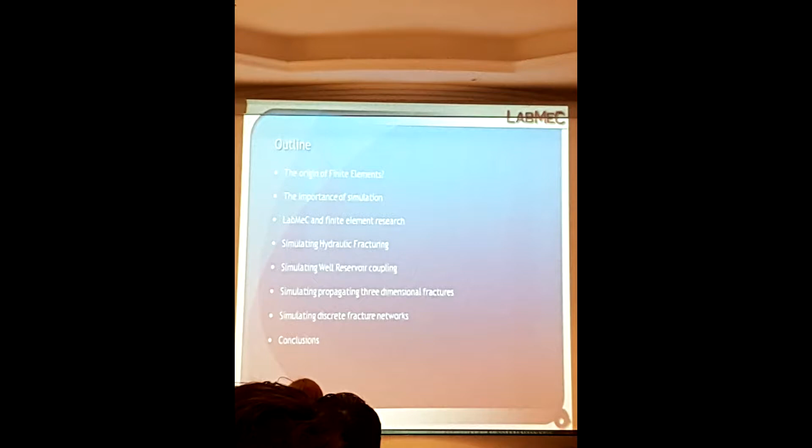So numerical simulation, what's the essence of numerical simulation? So at the first point, we always have a physical problem. That's the start.

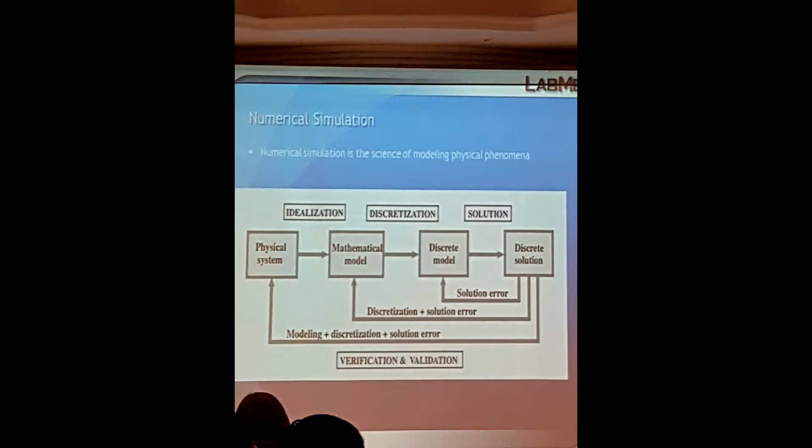Okay, so now I'm going to go back a little bit and talk about the origin of the finite element method, which I think shows how engineering problems actually have steered the development of the numerical approximation techniques. So that's why I think it's relevant. The first finite element models of the development of the technique were motivated by aerospace engineering and by simulation of the loads on airplane wings in particular.

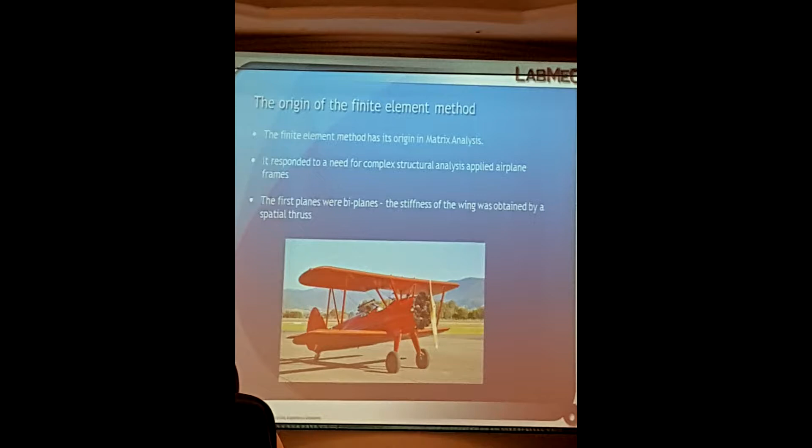So at the end of the First World War, the airplane evolved. I mean, it was known that the speed of an airplane is determined by the drag coefficient. So if you have two wings, you have twice the amount of drag than if you had one wing. So a monoplane was obviously much faster than a biplane.

And in warfare, the faster the plane is, the more agile it is, and the more probability it has to bring down the opponent. So a monoplane was the way to go.

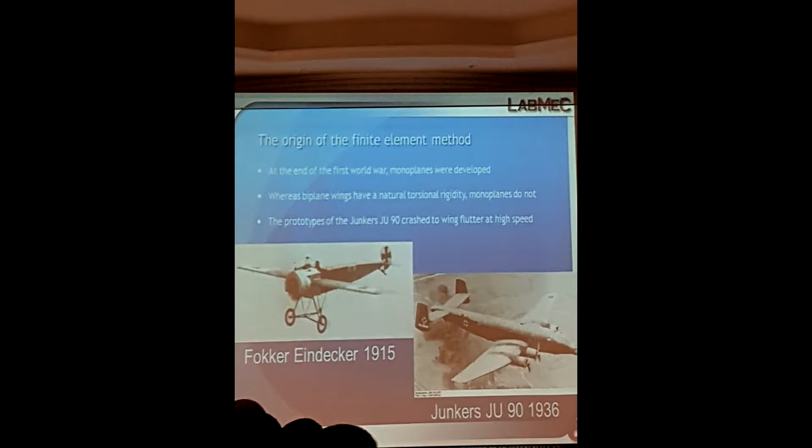So what happened with the monowing is that you don't have the truss system anymore. So if you look at the structure of a wing, internally you have a truss, okay? But this truss does not have by itself torsional stiffness. So in order to have torsional stiffness, they have to cover the wing with aluminum plates or with plywood plates in order to obtain the torsional stiffness.

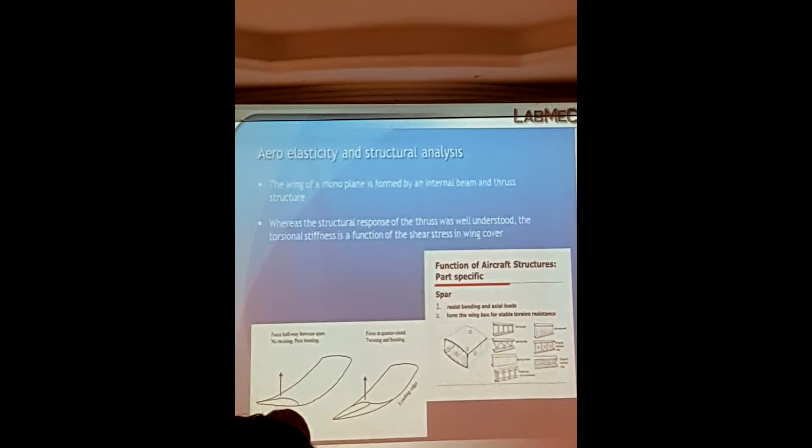Okay. So the torsional stiffness of a box depends on the shear stress in the plane of the box. And this shear stress cannot be computed with matrix analysis.

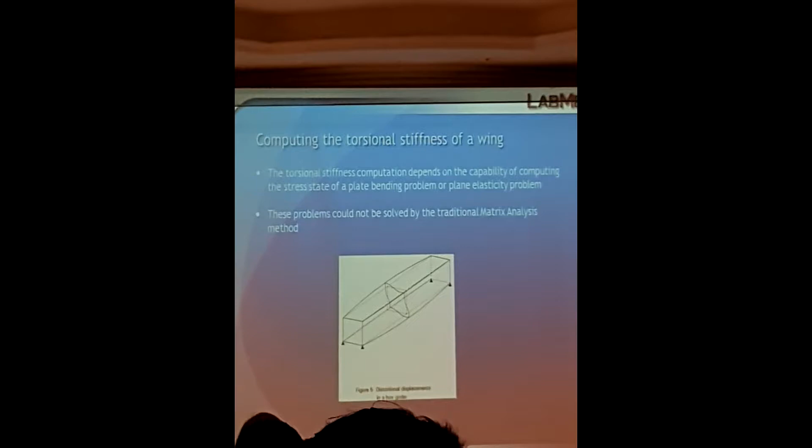Okay. So the problem was solved by engineers of Boeing and researchers of the University of Berkeley, and they developed a direct stiffness method to compute the stiffness of the box wing. This direct stiffness method was the origin. If you look at this publication, you see exactly what finite elements are.

So here we have Clough. That's the only picture I found of those 4 researchers. The other one I couldn't find.

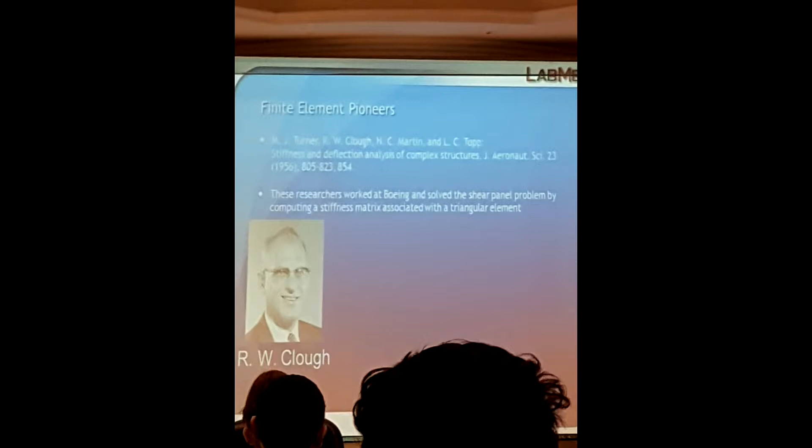So this is a publication of '56. For those, most of you were not born, I was not born at that time. But there were no computers. I mean, the digital computers available started with Fortran 1, and it's more or less 1960s that you have the first digital computers.

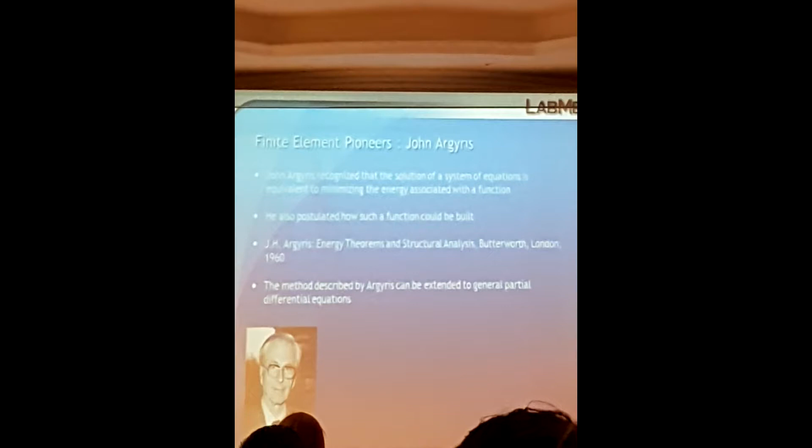So, okay. Yeah, automático.

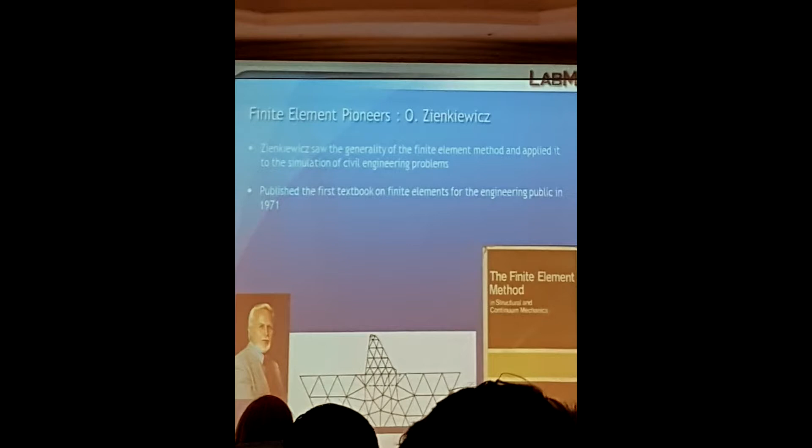Another finite element pioneer is the person who has been my PhD advisor, Professor Oden. He made the bridge between the finite element technique which Zienkiewicz published in his book, which was essentially an engineering method for solving structural problems, and the mathematical community. And so he has brought a lot of understanding of the mathematical properties of

the finite element method. And he has this first book in '76, which shows you a little bit: '56, '60, you have Argyris showing the minimization, 10 years for Zienkiewicz to write his first book, and then '76 to show that the technique is actually something much more general than the structural analysis method.

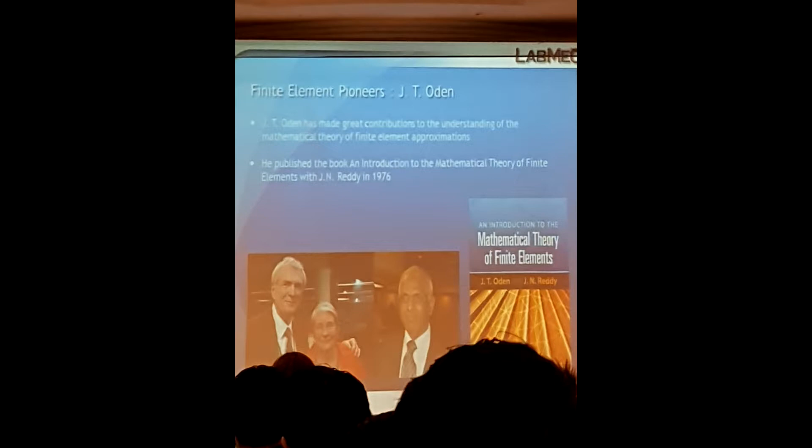So this brings us to the question: where are finite elements applied? Why is this important for us? It's very commonly applied in very expensive projects, like building of rockets, huge engineering structures, or in mass-produced items. So it's safe to say that your iPhone has been thoroughly simulated by finite elements. Your car has been very much simulated by finite elements.

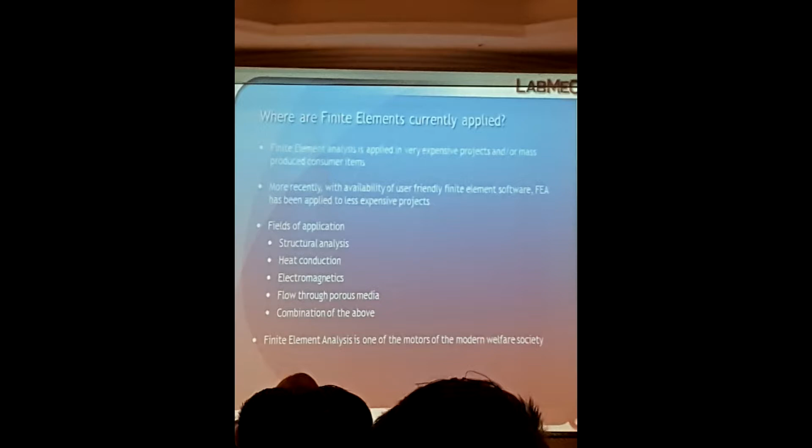So, this is one of the examples. I will go to petroleum engineering, but this is one of the most critical examples, the most important examples. So, what do you have in a car? Well, you have crash simulation. You can totally simulate how a car will deform under an accident, so that's extremely important. It's not the kind of use you want for your car, but when it happens, it's extremely important that the habitat where the driver is is not affected by this car crash.

You have acoustics, so we have the fluid flow, the vibration of your mirror, the vibration of internal power, thermal comfort simulated. The tires are totally simulated with finite elements. The interaction between the different layers of your tire is the area of finite elements. The design of the profile of your tire is a fluid structure interaction. This is also a crash.

The gearbox, the stresses in your gearbox, totally simulated with finite elements. The crankshaft, the stress in the crankshaft, the optimization of the crankshaft, trying to take out the last gram of the piece, shock absorbers, everything is simulated with finite elements.

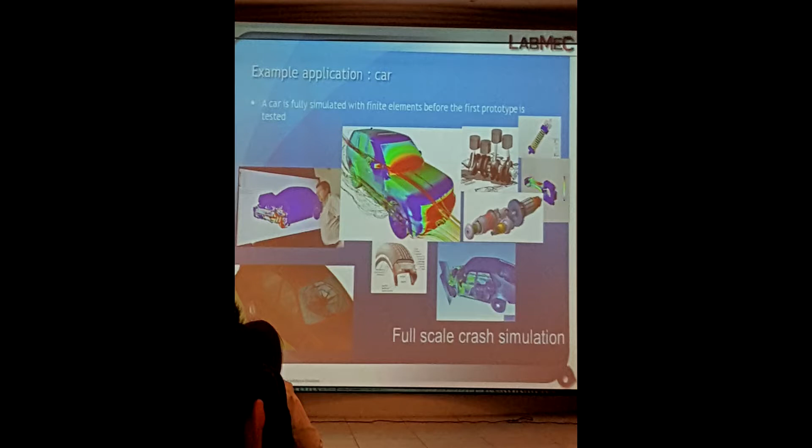Okay, so here we get to petroleum engineering. One of the first engineering applications in petroleum engineering obviously was the structural analysis, which is the origin of the finite element method, in which the platform is being simulated for stresses, that's okay, but mainly for safety, because those jacket platforms are usually in the sea and they are subject to periodic loads. And so these periodic loads can lead to fatigue problems.

So a fatigue problem is like if you take a piece of paper and you bend it enough, if you've done it millions of times, the paper will rupture. And so the same thing happens with those platforms. They are being subjected to wave loads for years and years in time. And so they should not fail due to fatigue. So this is where the main problem is in terms of research and finance: to avoid fatigue problems.

Entrando en el campo del petróleo, podemos observar que tenemos unas plataformas marinas, y estas plataformas fueron simuladas nuevamente con el método de elementos finitos, y las cargas son simuladas como inició el método en la estructura. Estas estructuras tienen diferentes cargas, producto de las olas y de la marea, que generan un movimiento.

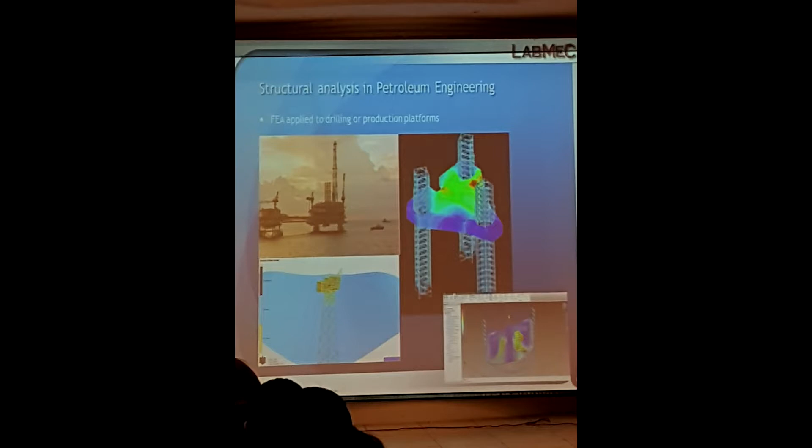Finally, we arrived in the area of real interest in petroleum engineering: extracting the oil from the reservoirs. The reservoir flow is one of the most important parts in petroleum engineering to be simulated, because the amount of petrol you can extract from your reservoir depends essentially on the way you're going to extract it. Once you have a reservoir, you don't try to extract the maximum amount of petrol right from the start. If you do so, you will produce coning.

It's like, if you have a cup of ice or an ice drink and you push too much, very soon you're going to have air in your straw, and so you don't get very much ice, because once you have air, you only get air—you're not going to get any ice anymore. I don't know if the similarity makes sense, but it means that in order to extract the petroleum, you need to study or optimize the way you're going to get the oil out of the reservoir to the drilling site.

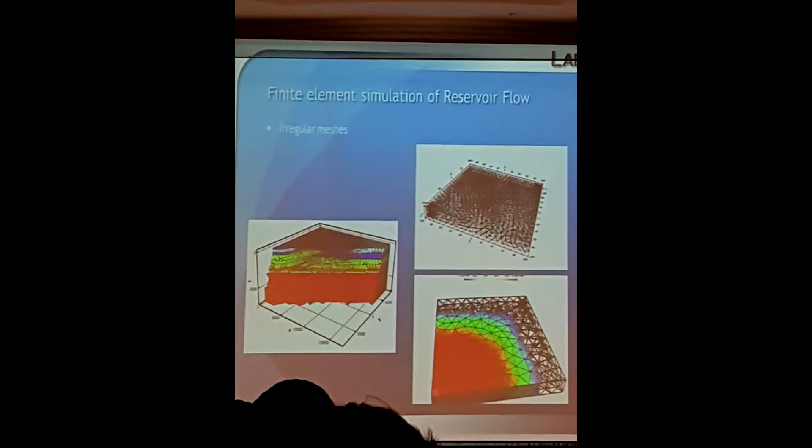Another application in petroleum engineering, which is very much in fashion and being developed now, is to simulate the deposition of organic material in geological flows. Petroleum is generated by the decomposition of organic material that was being transported many millions of years ago. The essential thing for a petroleum company is to guess where this petroleum can be found, so we try to simulate the geological times and see where most likely the organic material has been deposited and trapped.

So it's not enough to have organic material. You need to have traps also. You need to have cap rocks. Without cap rocks, that organic material will have produced petroleum, but it will have evaporated, and we can't produce it. It will not be there.

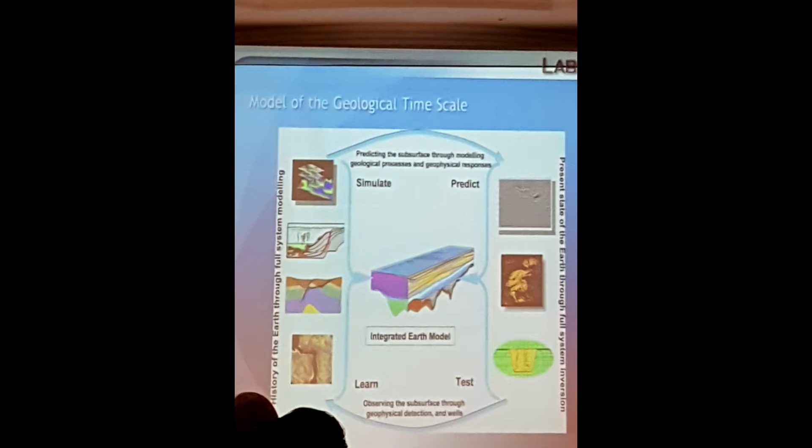Now, another area where our laboratory has worked is the simulation of hydraulic fracturing. When you generate petroleum, you need to pressurize your reservoir at an injection well. If you don't do this, your reservoir will have a pressure drop, which can lead to pore collapse and the loss of permeability of your reservoir. So you always have, in general, a producer well and an injection well.

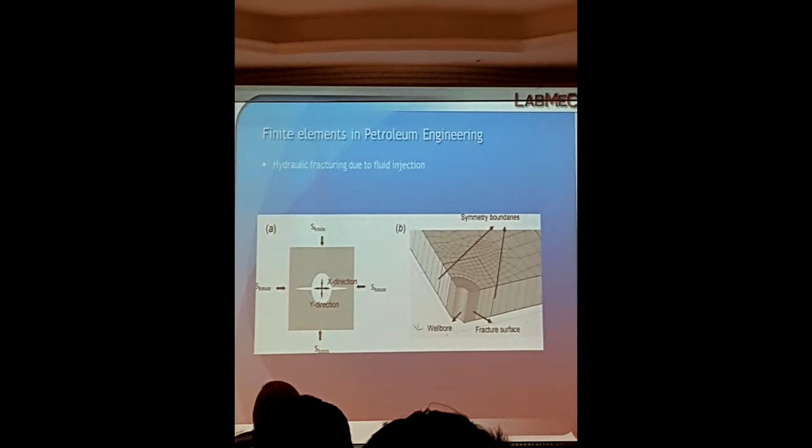This is another example of fracture simulation. One was a fracture induced by fluid injection, but a very active line of research nowadays is production in shale gas. In shale gas, you essentially have a reservoir which was fractured in the first place, and which we're going to stimulate in order to extract the gas from that reservoir. We have to simulate it. We can simulate it, but it's a major effort.

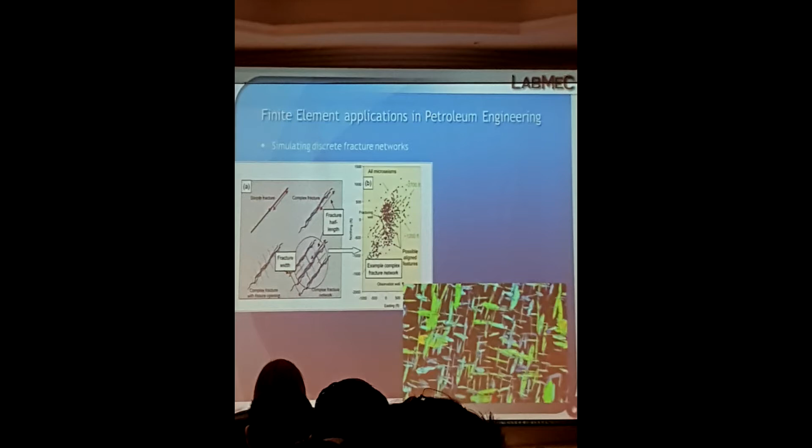So now I want to show you, I think I will show only one project because otherwise the talk will be too long. If you could look, we're going to go through many slides now. I want to go to the fluid, to the well reservoir coupling.

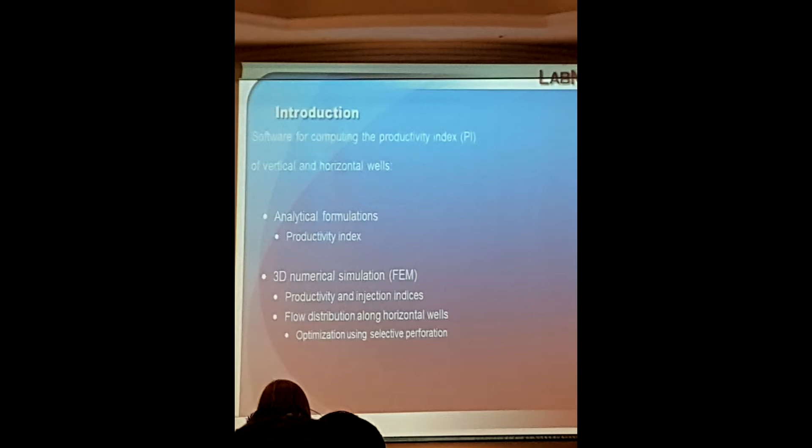So the simplification we did, so when you develop a numerical model, you never develop a model for the total physics, or hardly you do it for the complete physics. So the first thing you do is say, I'm going to simplify this, this, this, and this. So this is the slide which details the scope of our simulation. So it's, in this case, monophasic flow, steady state, drainage areas which are rectangular or elliptical, with skin factors, and then working towards high performance as well.

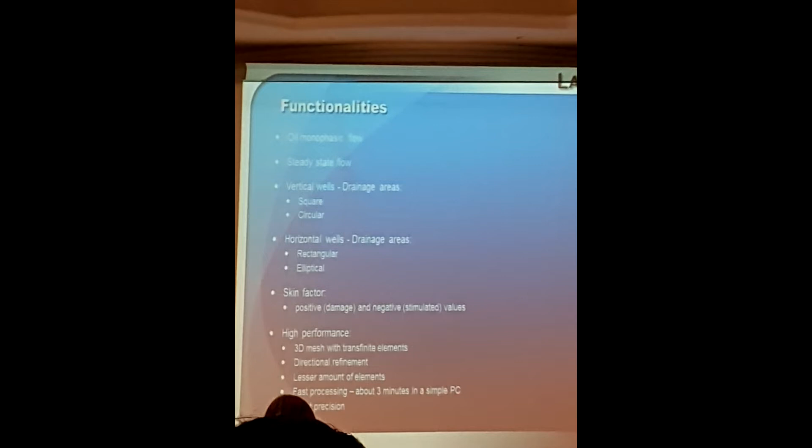We developed many technologies in the laboratory and I will show them graphically. We developed technology for curved elements, and we developed directional refinement and high-order approximations. So those are the three main technologies we developed in order to get to an efficient solution.

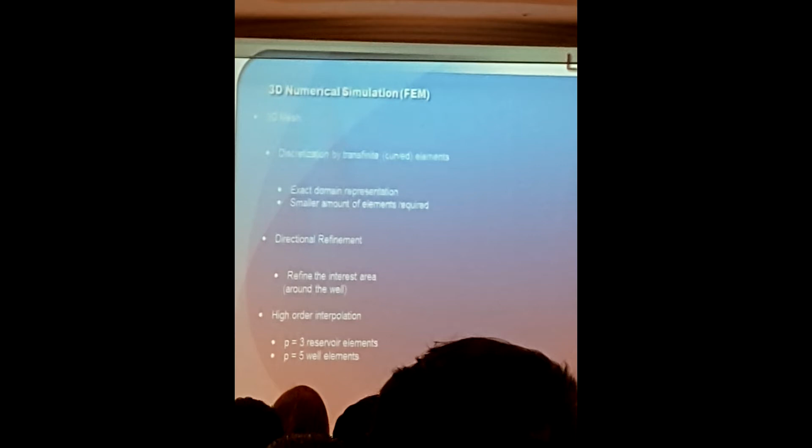So, using nonlinear mappings, we did model the reservoir just like in a CAD project in almost 21 global blocks, more or less 21. 19 blocks. Okay.

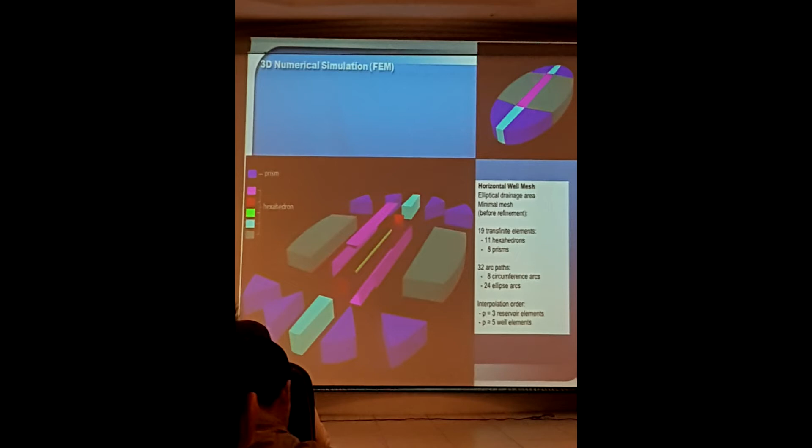So the challenge was to produce a well, a finite element mesh, which can zoom into the well efficiently. So you see here we have large elements that are about 70 meters wide, more or less. And towards the well we zoom towards those 20 centimeters.

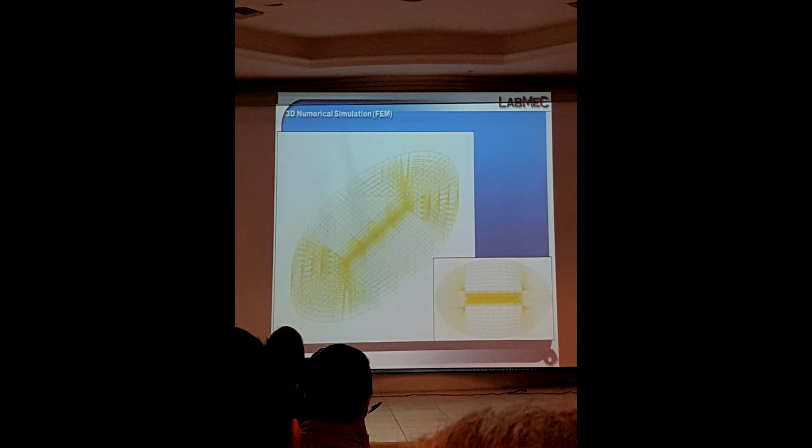So one of the technologies we developed was to do non-linear maps. So we start with the hexahedron, which looks like that, and then we map the upper border of the hexahedron on the circle, which is the exact geometry of the well. And so this is how we, even though having a very coarse mesh, we have an exact representation of the geometry of our problem.

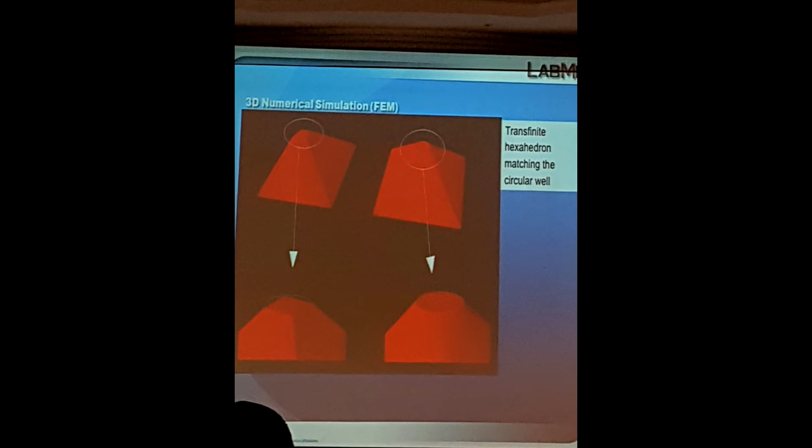Yeah, you can do the same thing for vertical meshes, but I will talk about it.

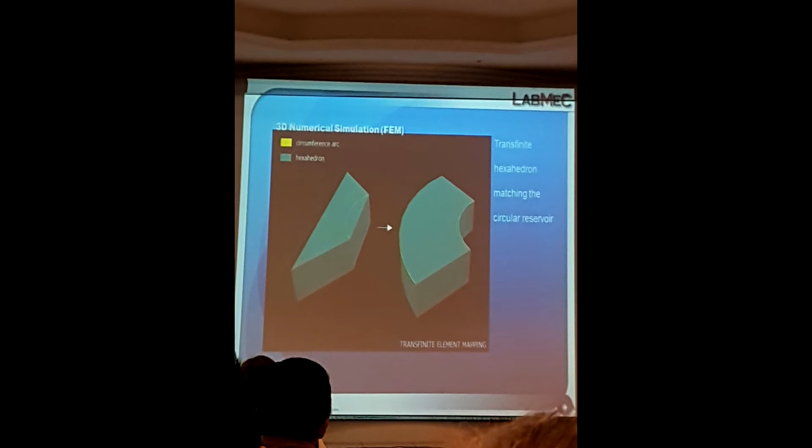But this is not what you want when you want to approximate the well accurately. You want to refine only in the direction of the well. And so conceptually it's simple, but in terms of programming this is a lot of effort. And so we developed this technology.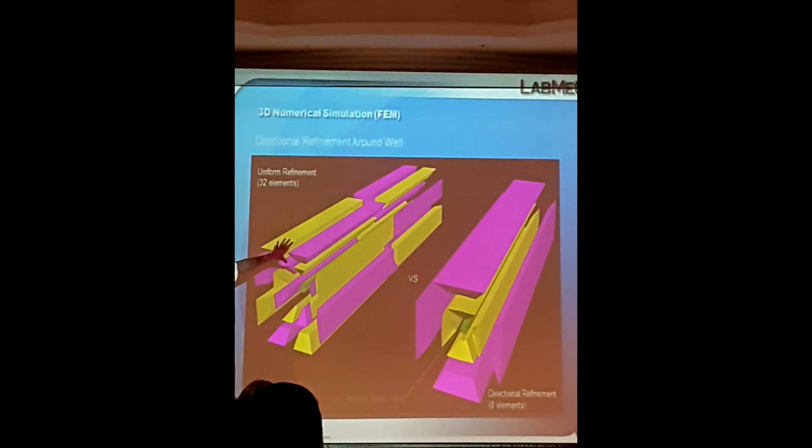So you see that this is a graphic representation of a directional refinement. So we are interested in simulating the details of the flow around the well. So we don't cut our elements in four, but we zoom towards the region of interest.

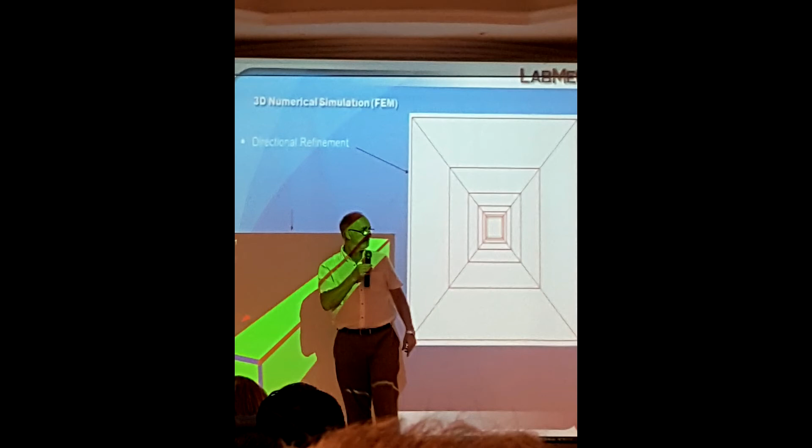Then we also coupled the flow in the reservoir, which is three-dimensional, and represented the flow in the well as a one-dimensional simulation. So then we had to develop a technology to couple 3D flow with 1D flow in a consistent way.

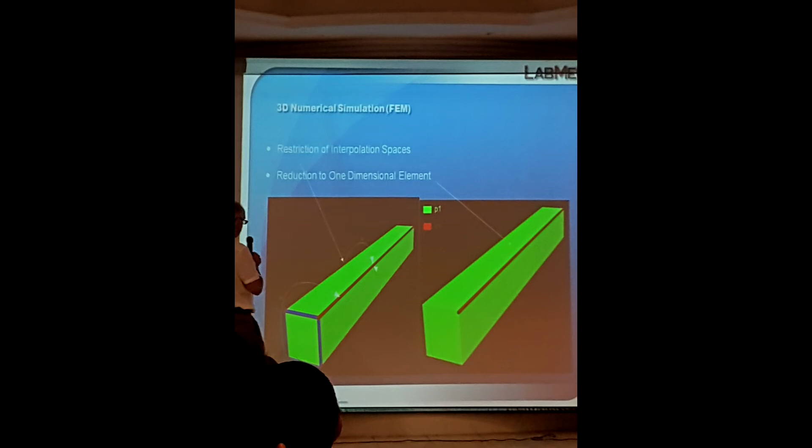The differential equation.

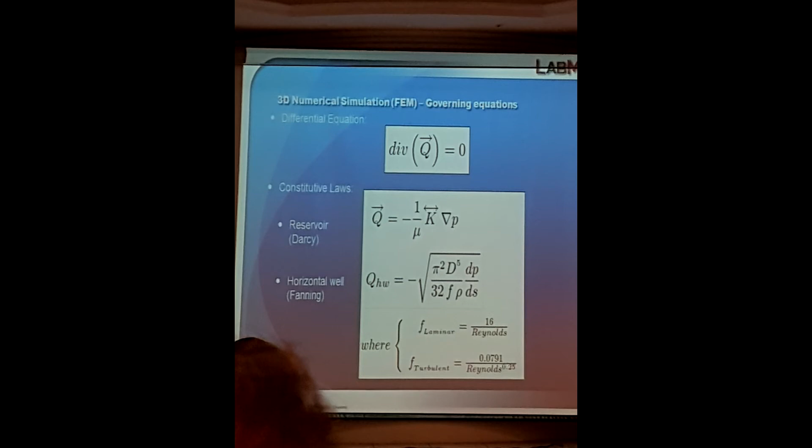The skin factor is modeled also, as we have a well flow and we have the reservoir flow, and there's a difference between pressure between the reservoir and the well, which is modeled as a resistance. So the fluid flow is proportional to the difference of the pressure of the reservoir and the well. It acts as if you would have a barrier.

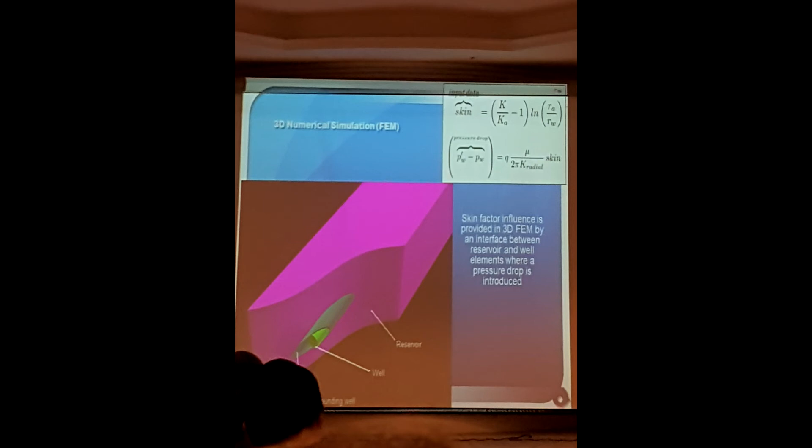So, one additional effort we did with our research group was to provide the petroleum company with a graphical user interface. This is kind of uncommon in research labs, because usually a research group will give working software to the petrol company, which they have to feed with an input file. We went a step further and made a graphical user interface.

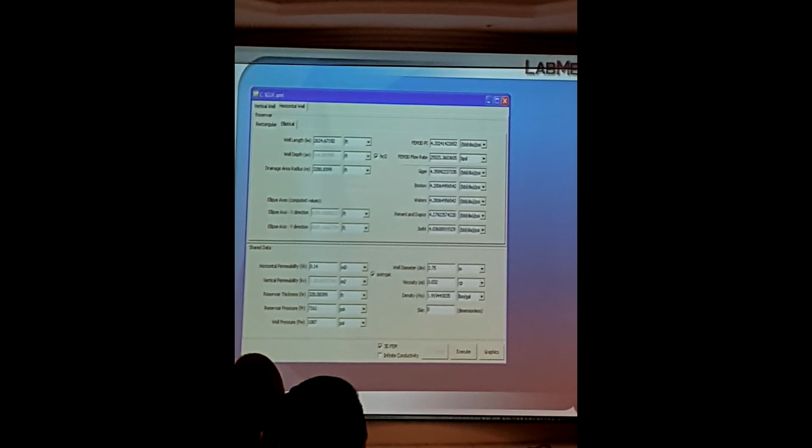Well, this is the setup of the Troll field. So we simulated a typical problem, which is a Norwegian field, which has been simulated by Ozkan, by finite differences. In Petrobras, they simulated the problem with CFX, which is a known finite element software, and in the green line we have our simulation. So these are the production.

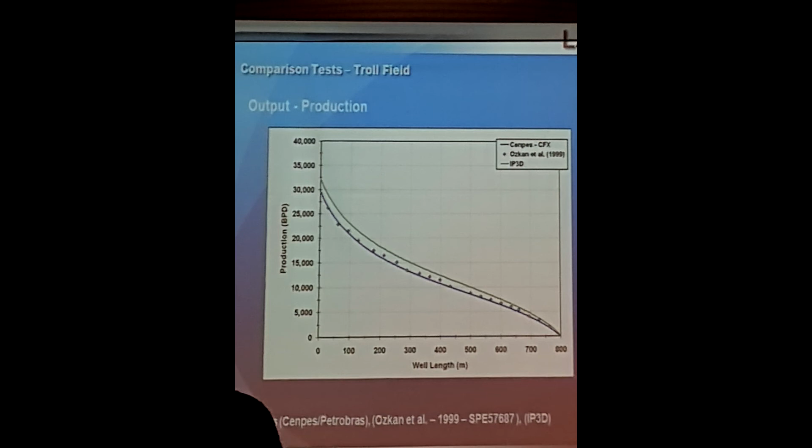So this is the rate of production at each point in the well, and you see you also have a very good agreement.

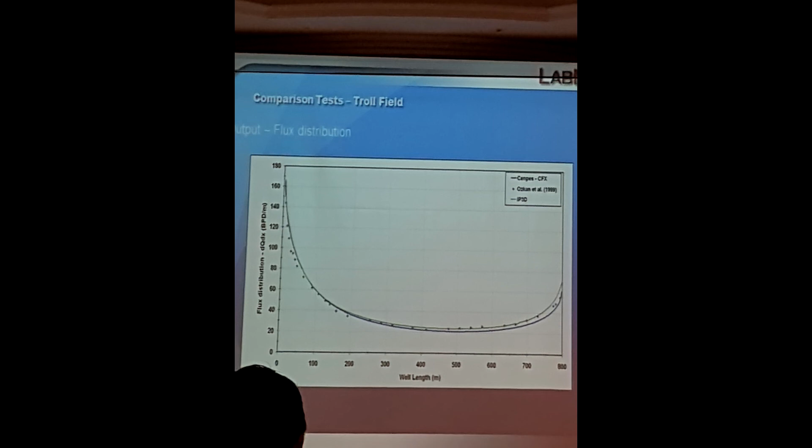So here we also have different graphs of the production curve.

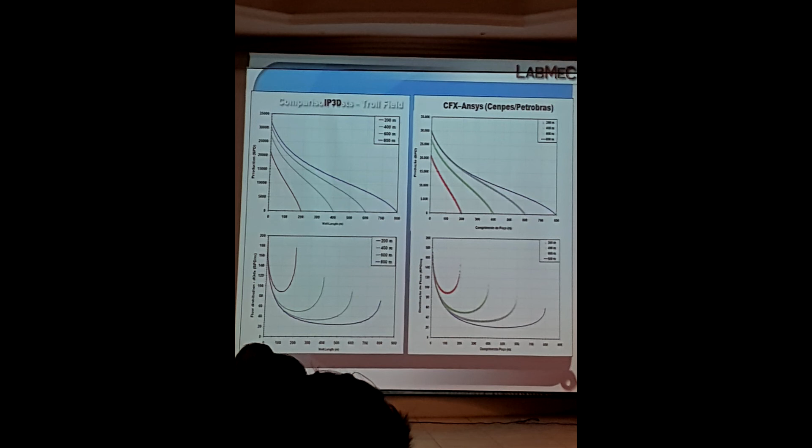One thing that is important to understand is that the finite element method is a method which has been developed by engineers to solve real-life problems.